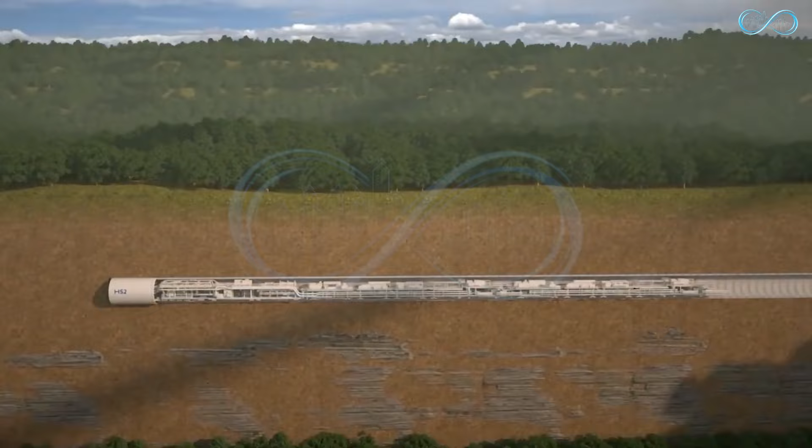Deep within the heart of mountains, massive machines slice through rock, clashing technology against nature. And through these clashes, the wonders of the modern world are born. Tunnels spanning thousands of meters connect the two sides of the mountains. In China, these engineering marvels are becoming a common sight. But how is China building these miles-long tunnels so fast? Let's find out. The beginnings.

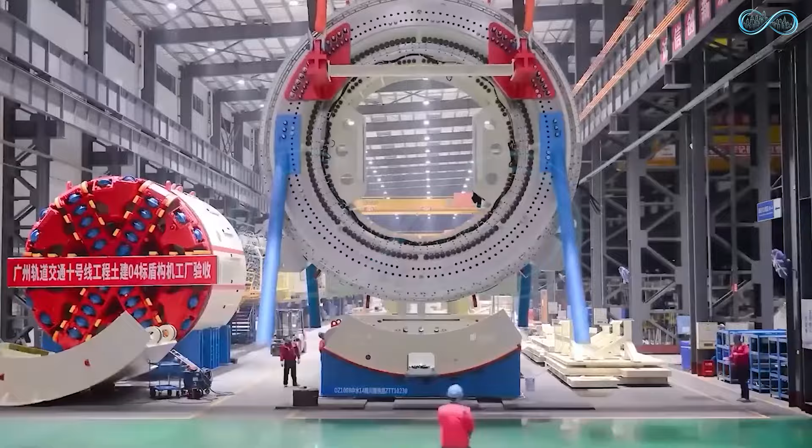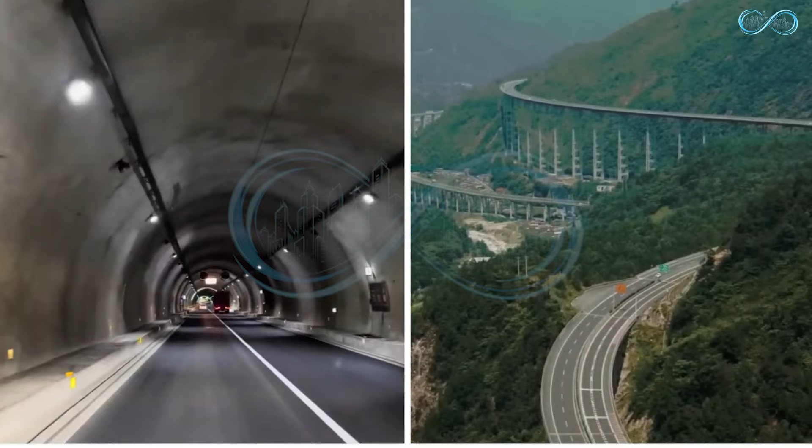The first question that may pop into your mind is, why does China build a tunnel in the first place? Surely building a road is much easier and less expensive than digging through an entire mountain made of hard rock. Well, to China, it is always about the long game. They don't just see the immediate gain, but also the long-term benefit. You see, normal roads have to wind around a mountain, snaking up with every twist and turn. Compared to that, a tunnel cuts straight through, turning the journey that would have taken hours by road into a matter of minutes. And this comes in clutch in the long term.

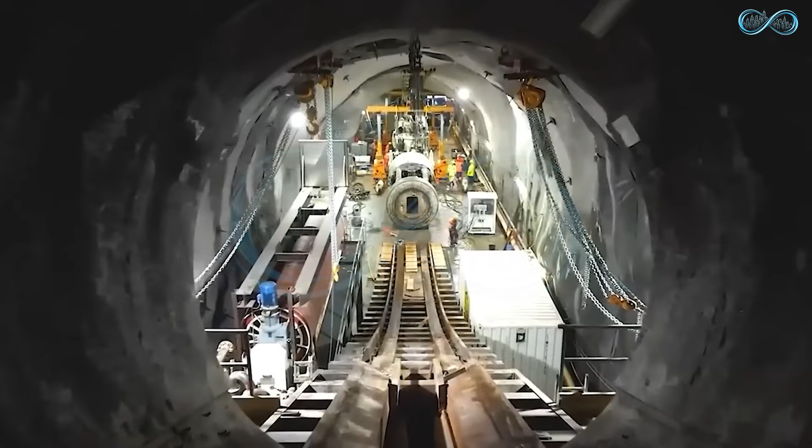This faster transit time translates to economic growth as people and goods can reach their destination faster. In just a few years, the millions China spent on building that tunnel will be recouped and keep giving back more in the form of job creation, talent distribution, and trade. But that isn't the only reason why China is building tunnels left and right. Turns out these things are actually saving lives.

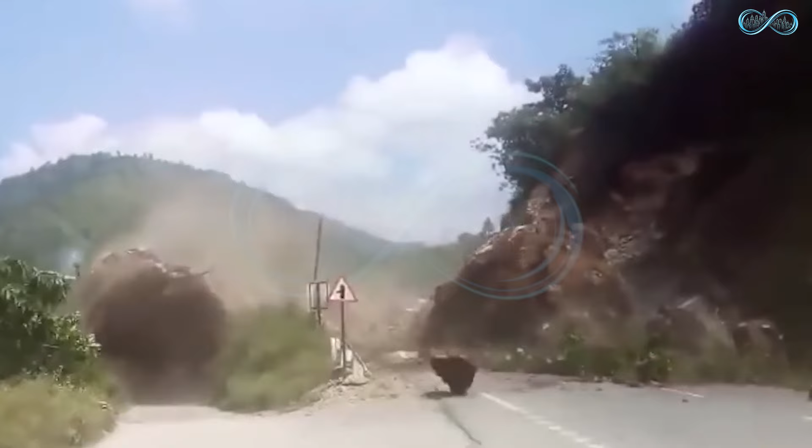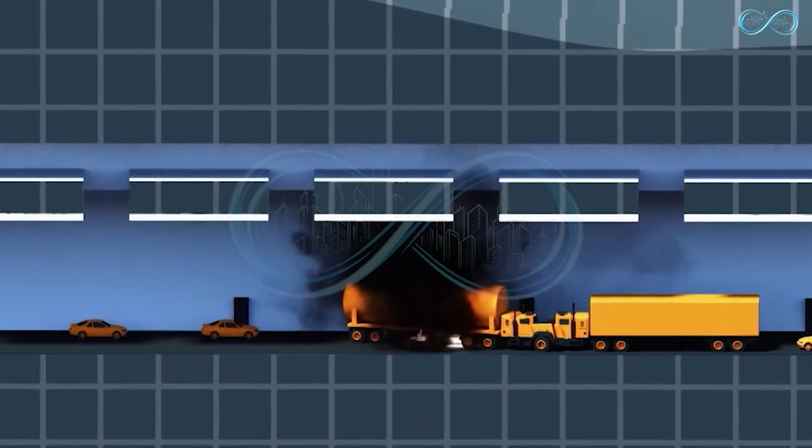Landslides are an ever-present threat to highways and roads built to cross mountains. One moment it is all calm, and the next a hail of rocks comes crashing down, destroying anything it encounters. And then there are those dangerous turns that hundreds of cars fall victim to every year. Tunnels don't pose these issues. They are a controlled route where most dangers are removed. And even if the worst comes to happen, there are safety protocols and evacuation systems in place to prevent harm. When you take all that into account, it becomes clear why China, a country that is making a huge effort towards making its economic centers more connected, is building so many tunnels.

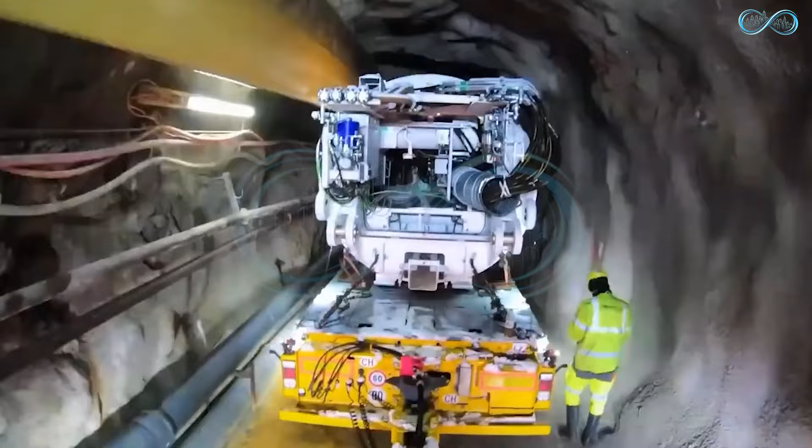Now that we know the why, let's move on to the how. Creating a tunnel that cuts right through a mountain is certainly no easy task. It's a complex process that begins months, even years before even a single rock is moved on the site. The very first thing that happens after China has decided to build a new tunnel and all the paperwork is done is land selection. After all, engineers cannot just randomly pick a spot and start digging. There are a lot of factors that go into this process.

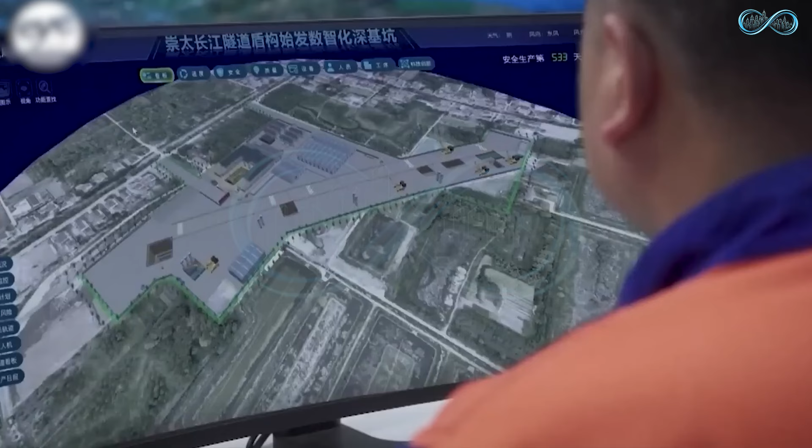Engineers pore over geological maps. Several different routes are selected, and among them, only a few make the cut. Boreholes are dug throughout the area where the tunnel is going to be to conduct tests. Additionally, cutting-edge ground-penetrating radars are deployed to map out the underground region and see if any significant faults exist. What they are looking for in these tests is whether the proposed routes have the right rock density and are stable enough to sustain the drilling process.

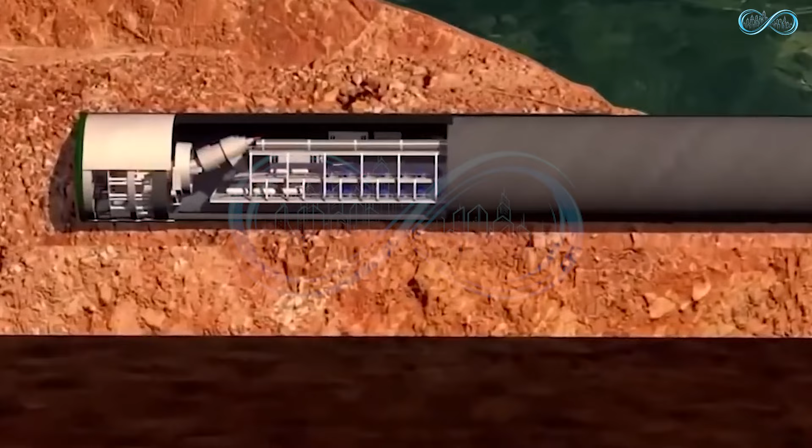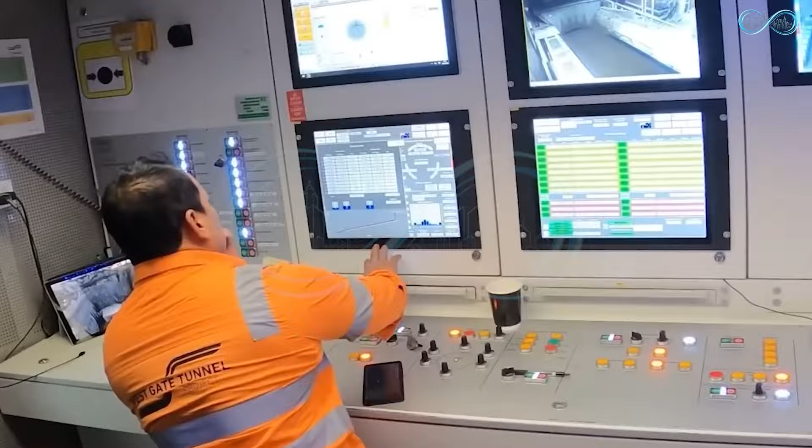They also look out for water aquifers or underground caves that may crisscross through the path, as they can add another layer of complexity for the project in the future. Experts go through this arduous process over and over again until they find the right land. And then the planning begins. This step involves figuring out the route in detail, determining what type of tunneling method is ideal for the project, and determining the dimensions of the tunnel.

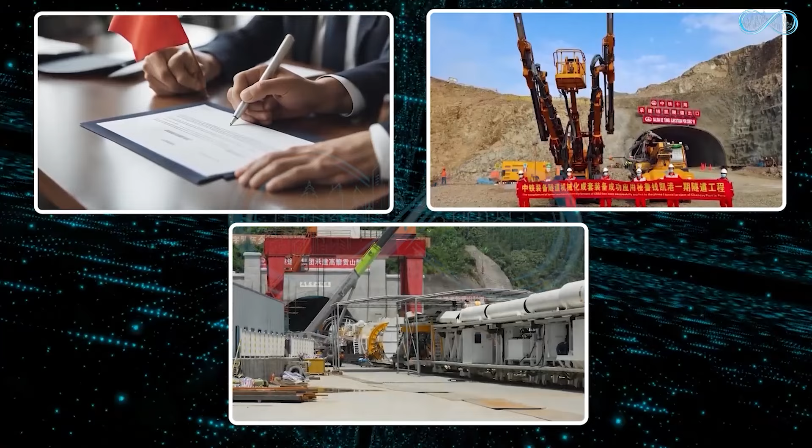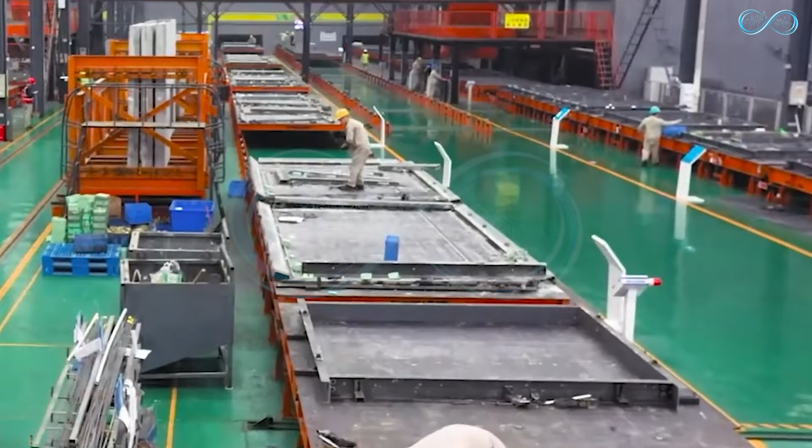An entrance and an exit point for the tunnel are selected and all the arrangements are made. Contracts get assigned, equipment is acquired, and materials are sourced. This process alone can take months, but that doesn't mean things are at a standstill. Experts continue conducting tests to determine the feasibility of the project. At the same time, factories around China start manufacturing prefabricated components.

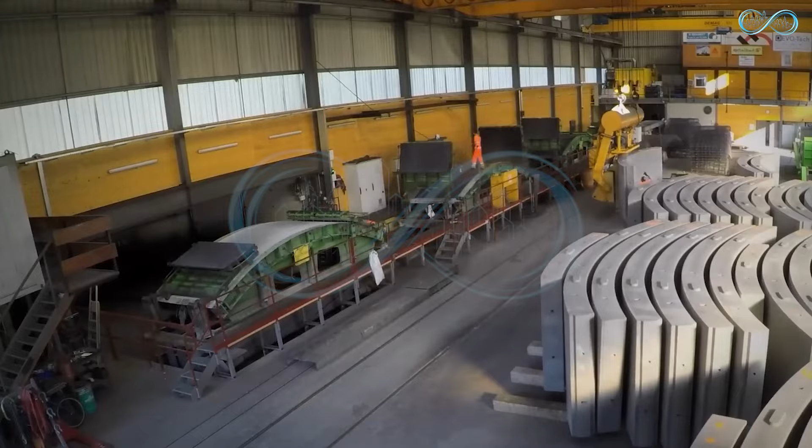China is a pioneer of prefabrication, and its tunnels are one of the mega project types that get the most advantage out of it. The tunnel liners, support walls, ventilation ducts, all of these things are prefabricated to save time and effort once the project actually begins. Compared to other countries, China prefabricates more materials for its tunnels, and by doing so, it is able to build faster and more efficiently. Once all that is done, it's time to dig the tunnel.

Now there are several different ways China digs its tunnels. The most popular of them all is using TBMs. TBM stands for Tunnel Boring Machine.

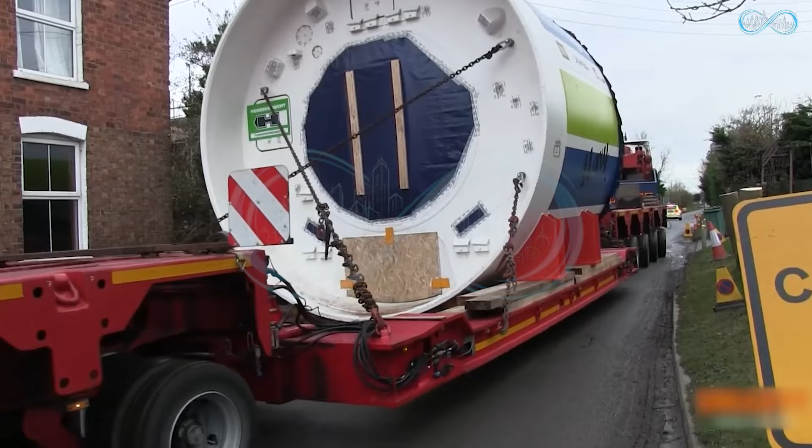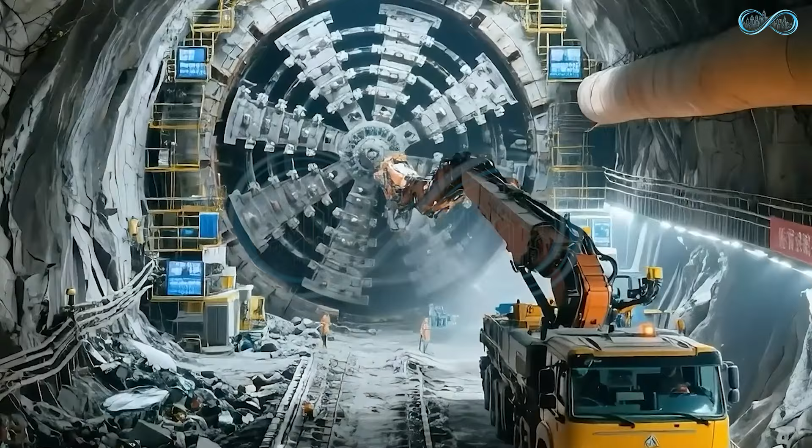And what exactly are those? Well, think of these like giant drills that are as large as the tunnel they are digging. These giants are designed to be a complete powerhouse that can cut through nearly any naturally forming rock effortlessly. So, slicing through a mountain is no big deal when you have one of these, and China makes great use of these marvels of technology.

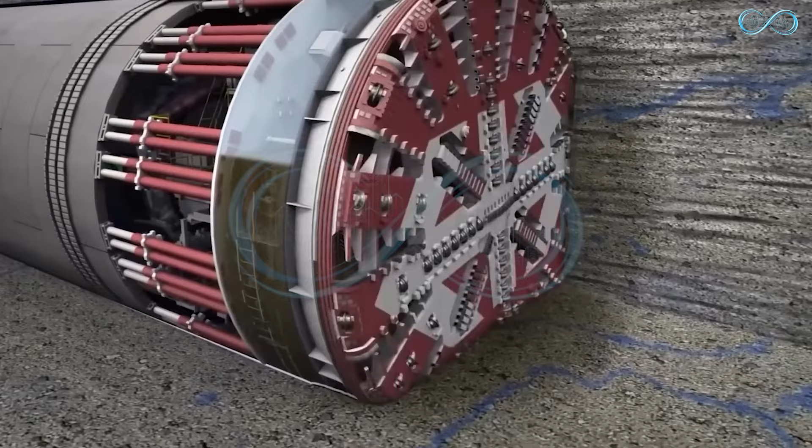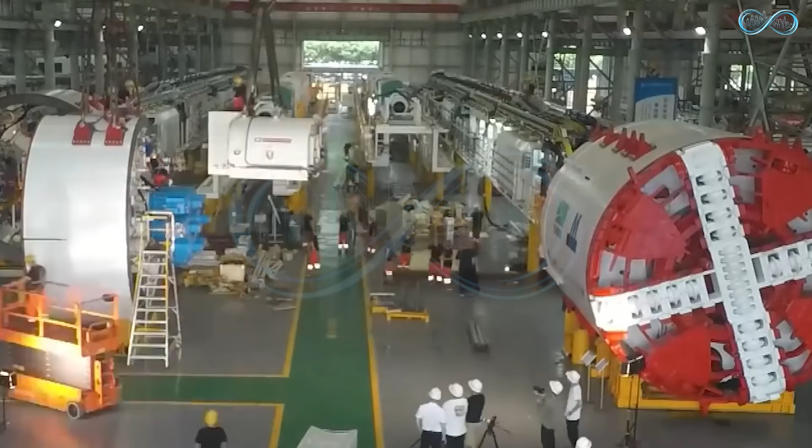But the question is, how to acquire one of these? The answer, at least for China, is incredibly simple. Just build one of them. You see, China is currently the top manufacturer of TBMs in the world. They are at the forefront of this technological innovation that is changing landscapes around the world. China is so good at building these that other countries come and buy their TBMs from China.

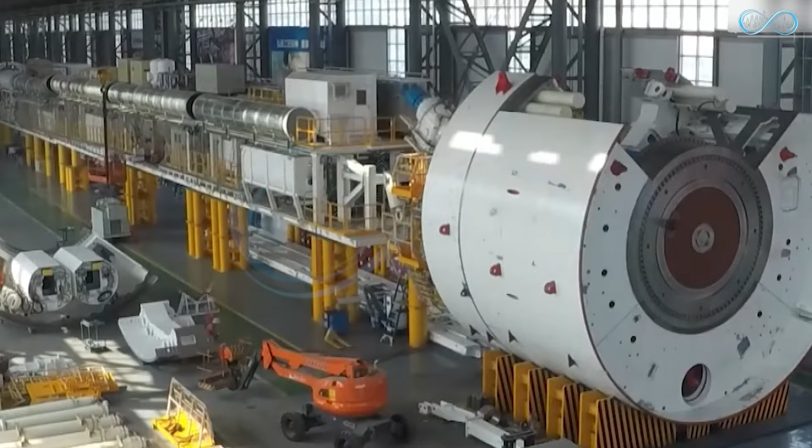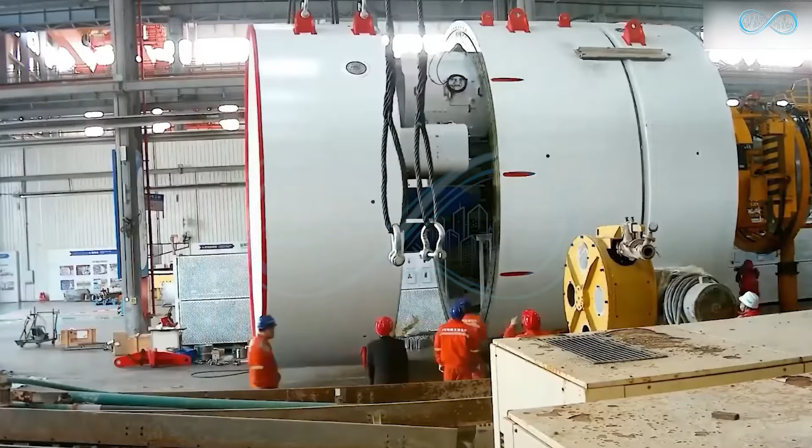So when China needs to build a tunnel, they simply have one of their state-owned companies make one. And that is no simple process. Building one of these TBMs requires months, even years of work. That's because each one is customized to the kind of project it is going to be used in. The type of land, depth, and rock types the TBM will work through all play a factor in component selection.

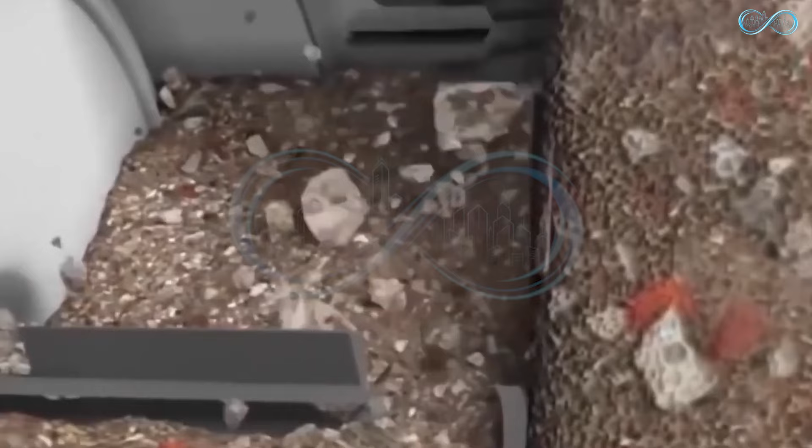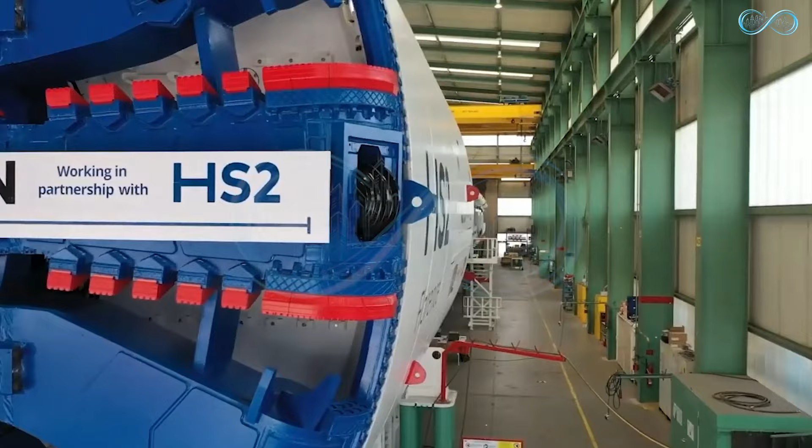First, experts create a 3D virtual model of the machine and run tests on it. And when everything has been refined down to perfection, the real work begins. Over the coming months, the components are sourced and the TBM is put together. Every component used is built domestically, no outsourcing. And once the TBM has been custom designed for the workload it is going to face, it is taken to the excavation site, where the tunnel is going to start being dug.

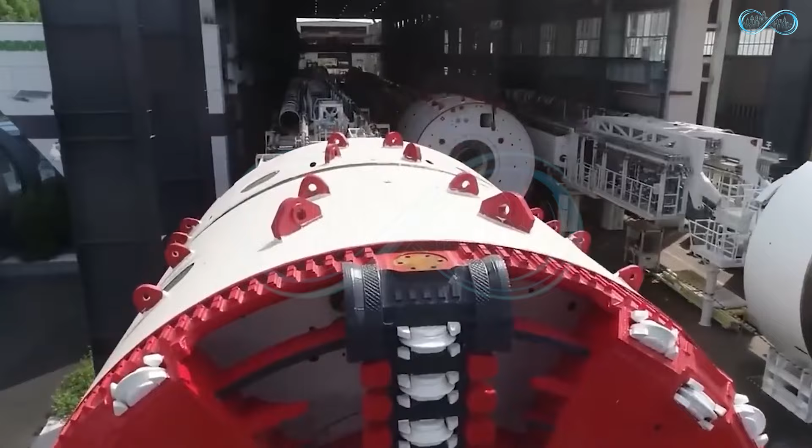This is usually done by disassembling the TBM into sections, transporting them separately, and then reassembling them at the site. And there is a good reason why that is necessary. TBMs usually weigh hundreds, even thousands of tons. And for a large tunnel, you are reaching the absolute limits of TBM size, reaching over 5,000 tons.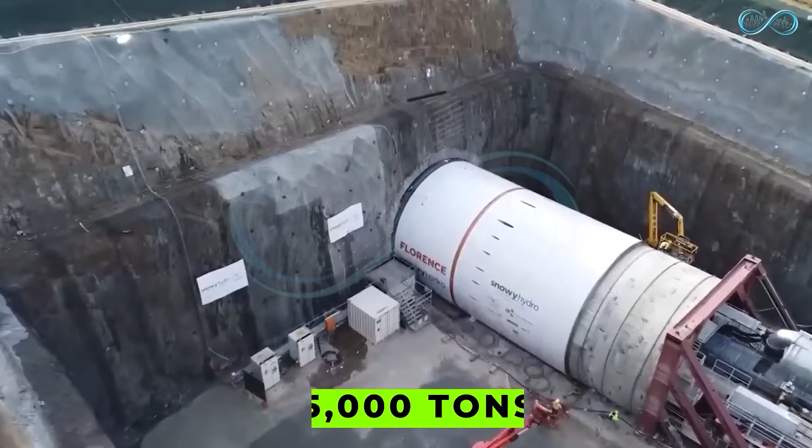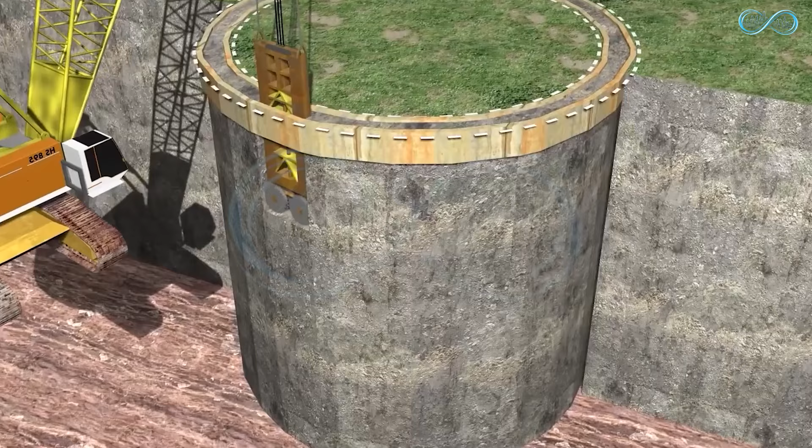Once the TBM is on site, the digging process actually doesn't start as you may be thinking. They don't set it on the ground and let it run into the mountain. Doing something like that would cause a landslide quite easily, bringing heavy rocks down on the expensive equipment and workers. Instead, the experts dig what is known as a launch shaft.

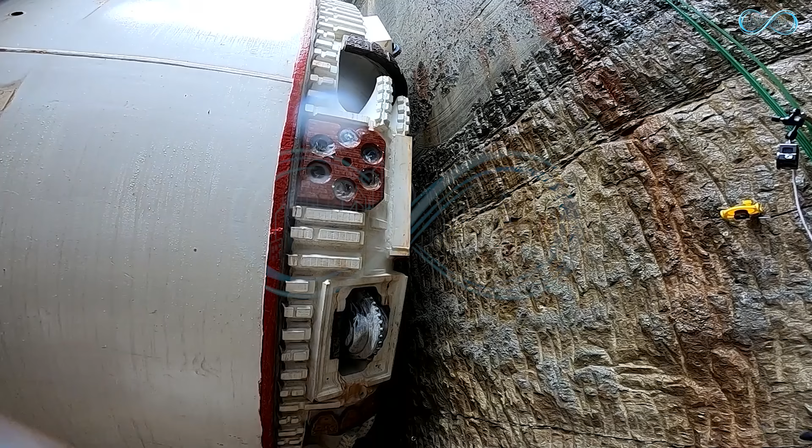What is that? It is a vertical shaft that is dug during the preparation for the tunnel's construction. It is large enough to accommodate the TBM and has been checked thoroughly for structural integrity. Think of it as the starting point for the tunnel. This point has been selected after careful testing to be the best place to start drilling, and it places the machine at the perfect height needed for the tunnel.

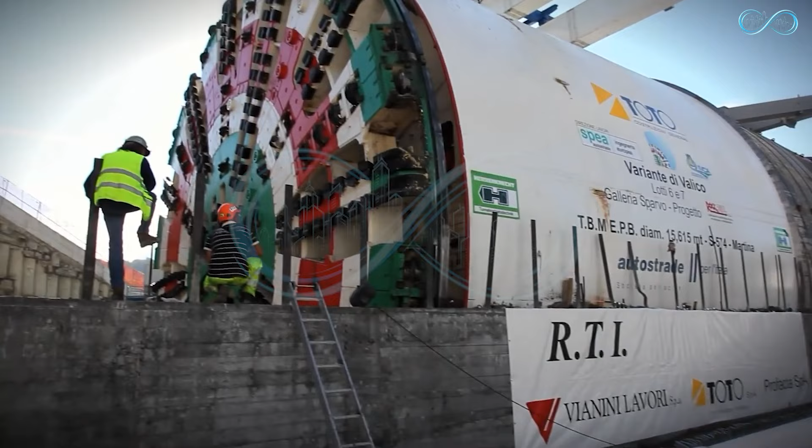The sections of the TBM are lowered into this shaft using powerful cranes. The cutter head is the toughest part to get down there since it is the heaviest and largest. But once everything is safely down there and the engineers have assembled the TBM, work can at last begin. And how these TBMs work is quite fascinating.

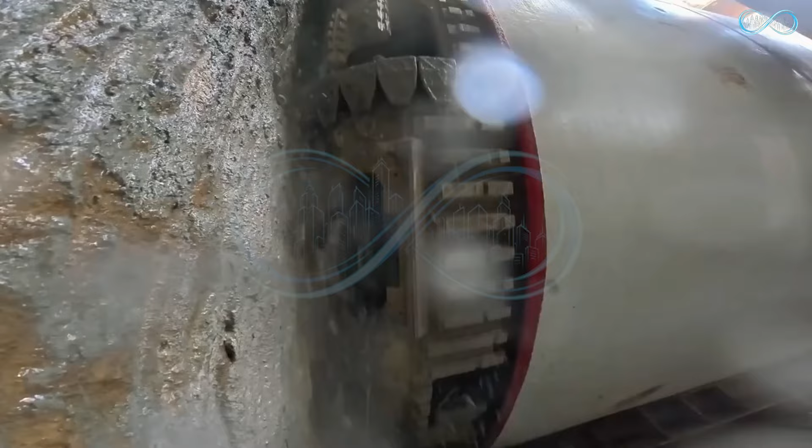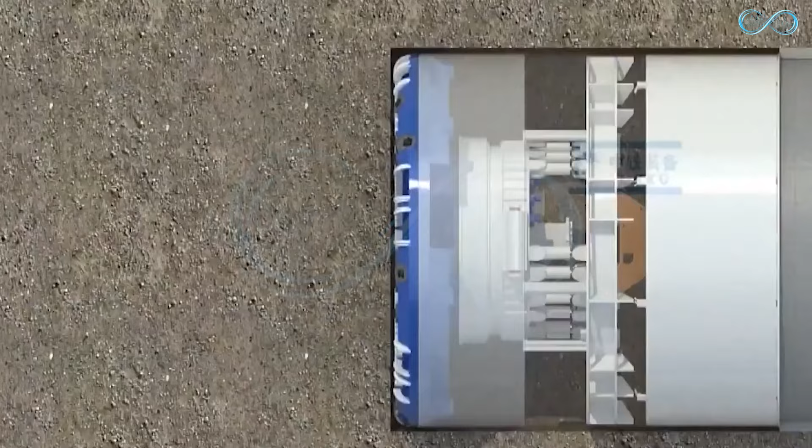The main component being used is the main cutter head. This gigantic disc is made of a hard metal with blades attached to it, and the entire thing is rotated using a powerful motor. With each spin, it cuts into the earth, breaking apart rocks and slicing out the dirt. Think of it like a drill head. But just like a drill head, this cutter head is also only a part of the equation.

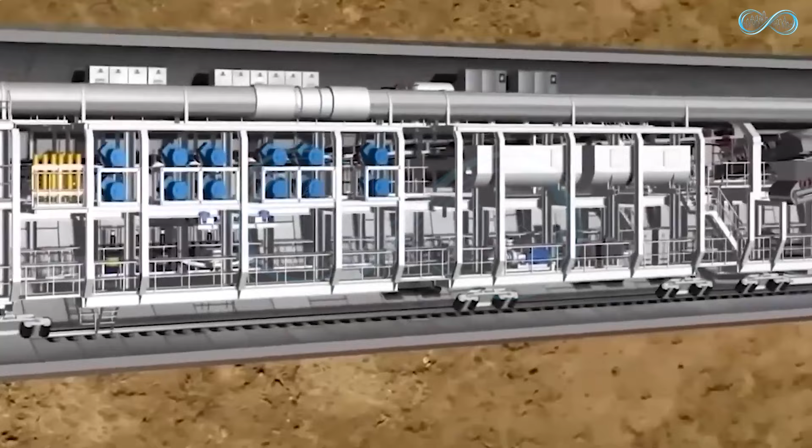There needs to be force pushing it into the rocks to make it function, and that force comes from hydraulics. The TBM has an extensive system of hydraulic mechanisms that often extends tens of feet behind the cutter head. The TBM anchors onto stable points and pushes itself forward with so much force that the earth itself gives way. And while all that is happening, another thing is happening at the back.

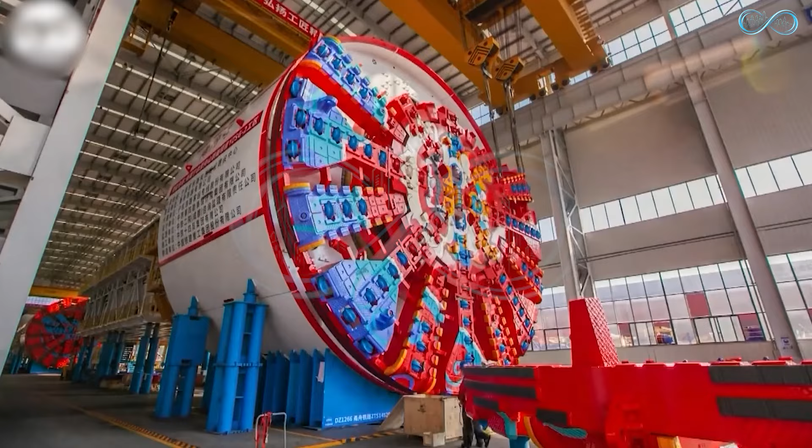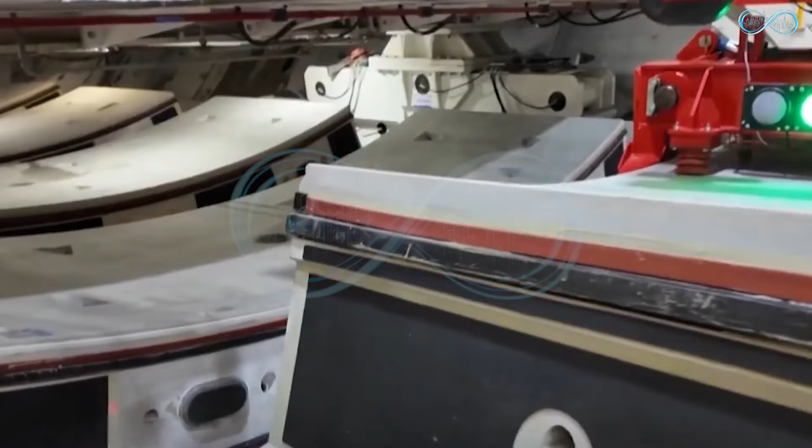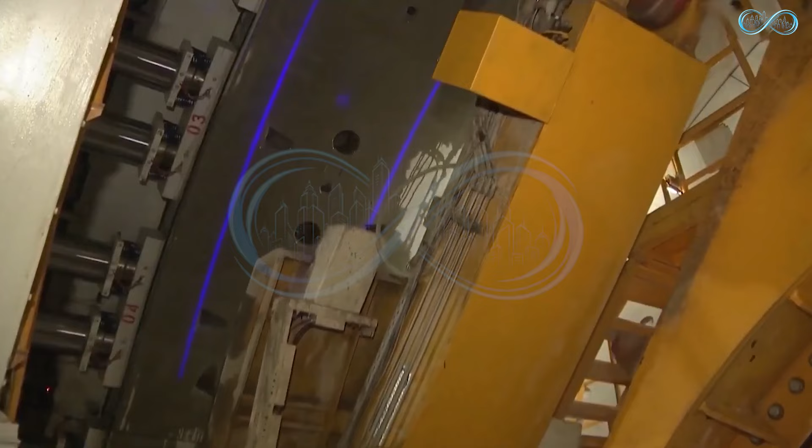There are mechanical arms usually installed on TBMs in the factory that serve a very specific function. These arms are designed to install prefabricated tunnel lining slabs in the back. These concrete segments have been prefabricated in a factory as well, and they are installed simultaneously as the TBM progresses with the digging. And these segments actually serve a dual function. The primary function is, of course, to line the tunnel to provide support, helping prevent cave-ins while also functioning as the very base for future addition of tunnel lining.

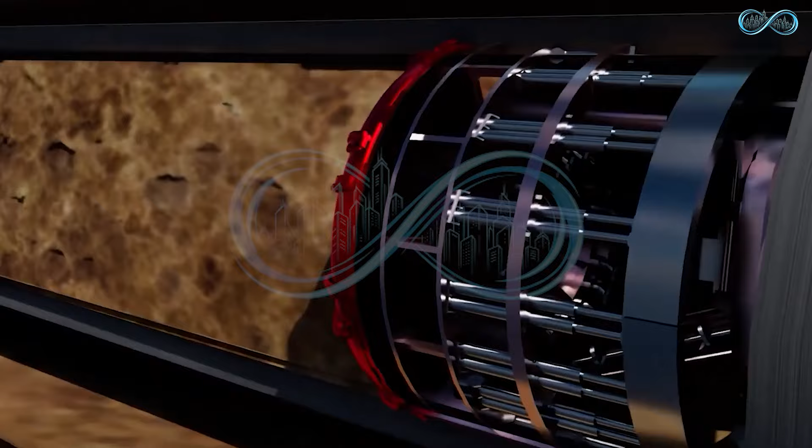The other major function of these segments is to act as braces. Remember I mentioned how TBMs use hydraulics to push themselves forward? Well, in most modern models, the TBM is actually bracing itself on these concrete segments to push forward, as they serve as a consistent surface to attach to. This way, the operators don't have to constantly find or create a bracing point for the machine. The process is automated.

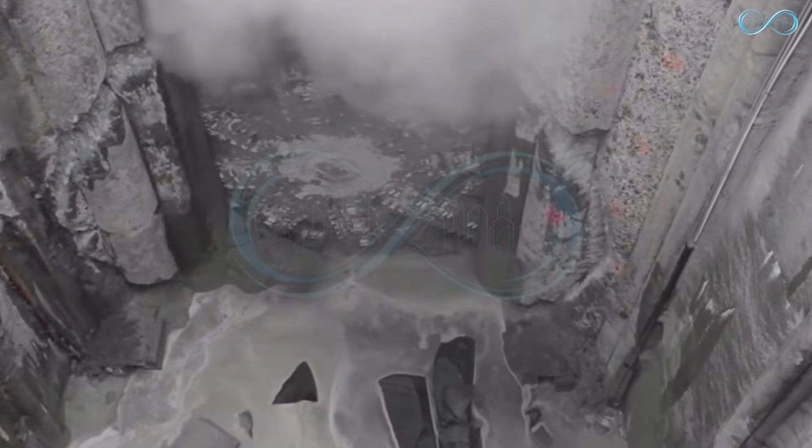Now, as the TBM is pushing forward, another thing is happening. A slurry, kind of like muddy water but thicker, is being pushed out of the machine. This water is actually the crushed rock and mud that are being excavated by the cutter head. You see, to aid the cutting process, the TBM is usually pushing water into the area being cut. This water helps reduce heat, makes clearing away the debris easier, and also reduces wear.

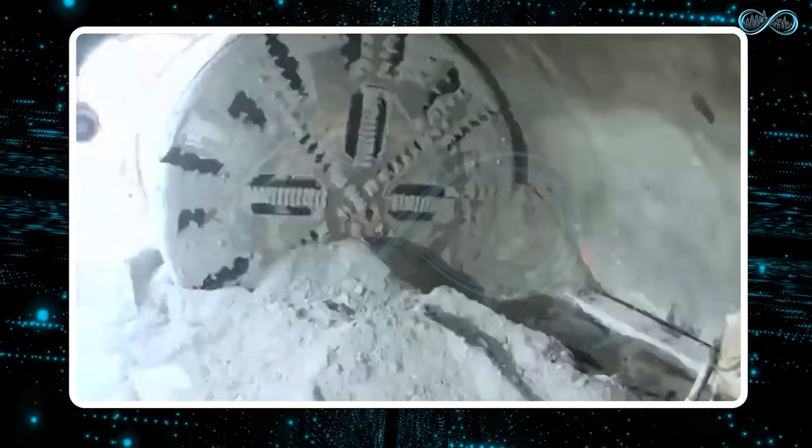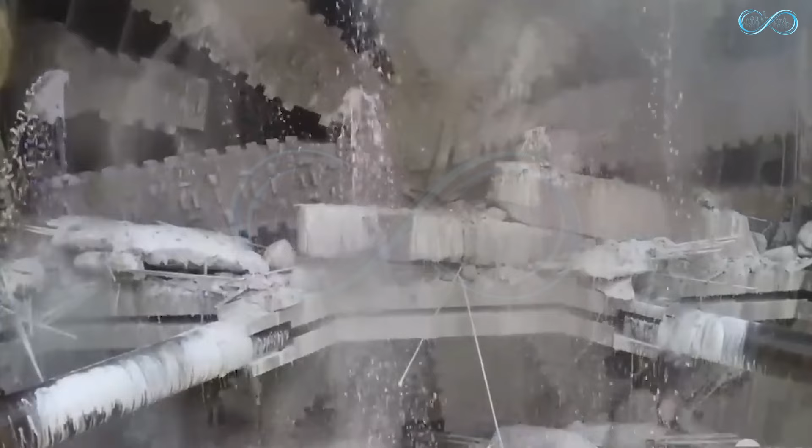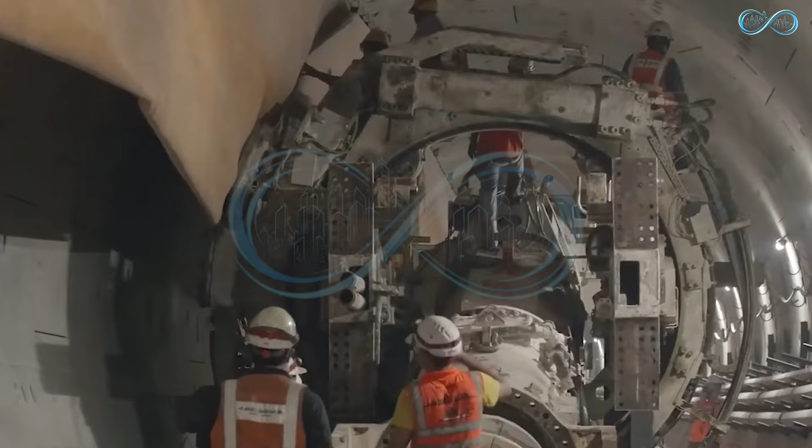TBMs have special channels built in that allow them to push out this slurry, but it's not like it's going to waste. For most tunnel excavation sites, they don't have an unlimited amount of water, so they have to get creative. A recycling plant is installed on the surface, which is connected with the TBM. The slurry is carried to the plant via pumps. All the mud and rock are extracted, and the now clean water is pushed back into the TBM for another cycle. This way, the engineers are able to minimize the impact on the environment while also maintaining an uninterrupted workflow.

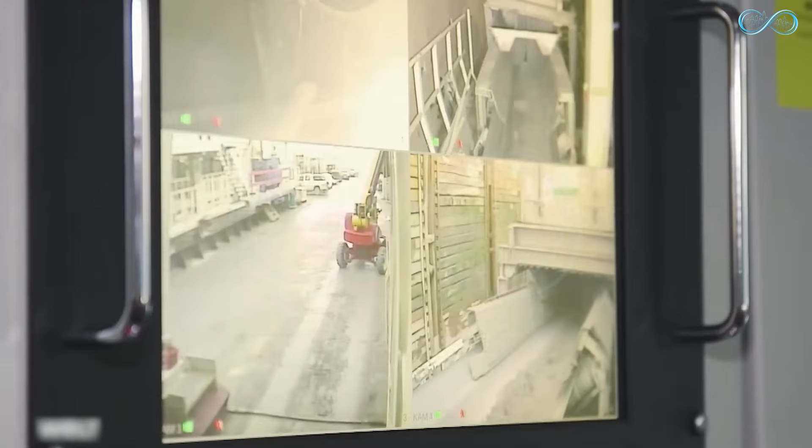And that's how a TBM progresses through the tunnel, clearing a few feet every hour. A slow and steady progress powered by powerful motors, hydraulics, and exceptional engineering. But it is important to understand that these TBMs are extremely sophisticated devices. They are lined with sensors that are constantly monitoring not only the machine, but also the surroundings.

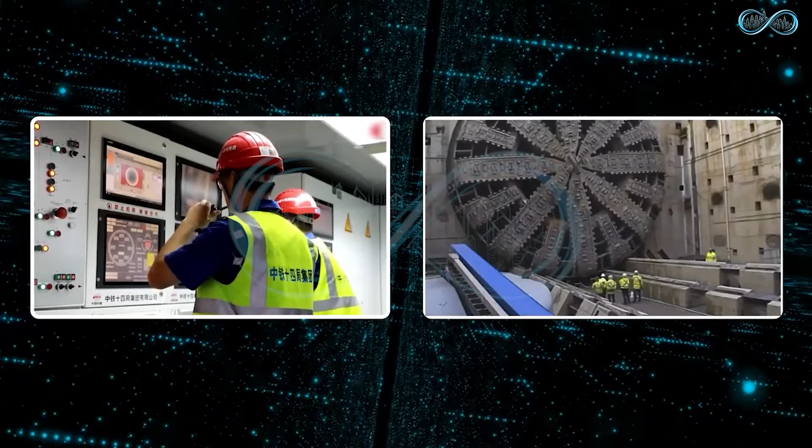A modern TBM has detection systems for dangerous gases like methane and hydrogen sulfide, while also monitoring the oxygen levels. TBMs also have seismic prediction tools and ground-penetrating radars constantly monitoring the surroundings to identify any possible instability that could result in a cave-in. If anything seems to be going wrong, alarms blaze and the workers evacuate. And as a final benefit, these machines also have a shielded area that helps protect workers.

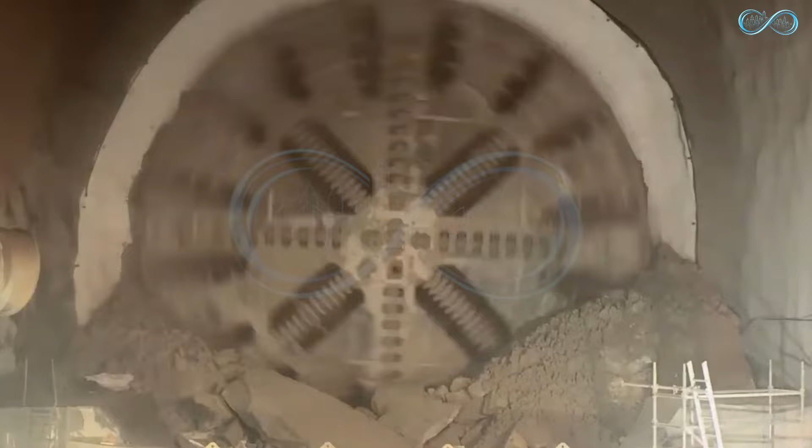The only problem is that as these giants move forward, digging through the ground, they kick up quite a lot of dust. This is why a very sophisticated ventilation system is installed and extended alongside the tunnel. This system evacuates all the dust from the tunnel to make it safer to work in. Additionally, there are navigation systems built into the TBM to guide it along the planned route. The work is precise to the extreme. These machines don't stray more than a few inches from the assigned route, even after digging for miles.

Slowly but surely, the massive machine digs out the extensive tunnel, slicing through the mountain's roots in the process. And eventually, after months of work, it reaches the last stretch. The end comes near, and awaiting at the finish line is a reception shaft. This is much like the deployment shaft, but it serves the opposite function. The TBM breaks through into this hollowed-out vertical cavity in the earth where its journey ends.

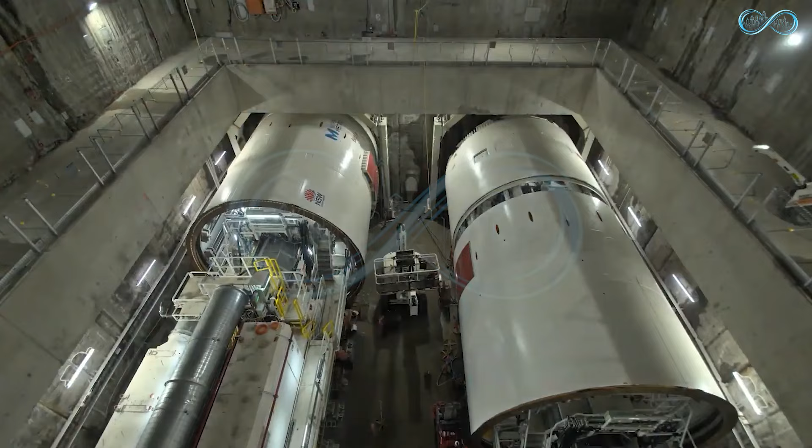The story doesn't end there, though. The workers cannot just leave the TBM lying here blocking the exit of the tunnel. The TBM needs to be removed. There are two ways that is done. The TBM can either be disassembled, removed from the reception shaft in pieces using a crane, and then loaded back up onto trucks to be taken to its next project, or it is laid to rest.

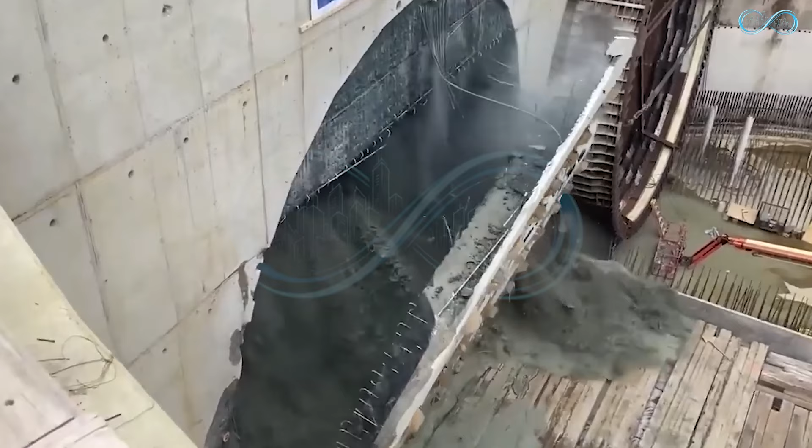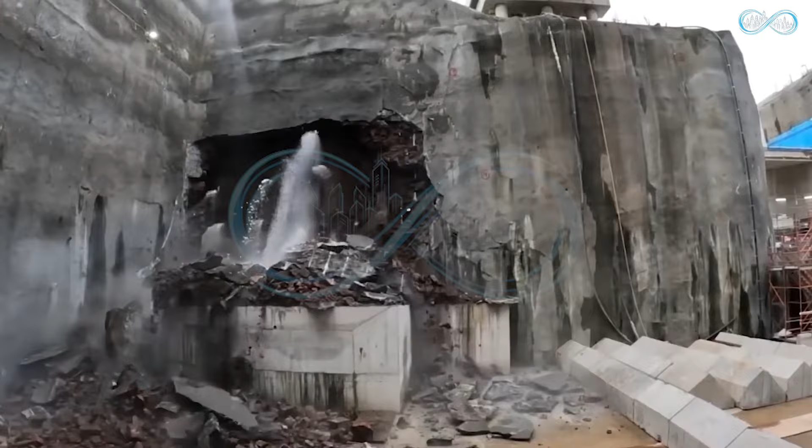You see, most TBMs are just built to fulfill their targeted project, and then they don't have any use left. They are custom built with the requirements of the project in mind, meaning they are not suitable for another tunnel that will have different conditions and specifications. And if a TBM cannot be reused, it is disposed of in a very interesting way. Workers dig out a giant hole in the ground. The TBM is then lowered into the hole, and it is filled back up with dirt.

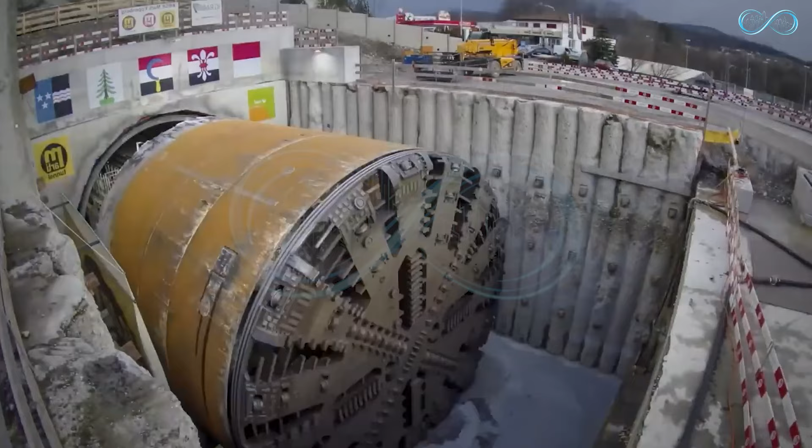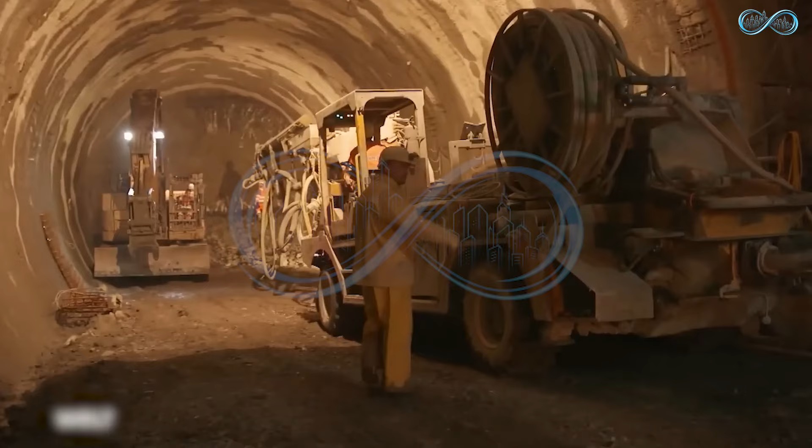More often than not, this burial is done right around the exit of the tunnel with the road built above it. Once that is done, it is time to decommission the shafts. Both the launch shaft and the reception shaft are filled back up with dirt as well. Just like that, the tunnel is finished, an arduous journey completed after months of effort. But it's not like digging with a TBM is without its own risks.

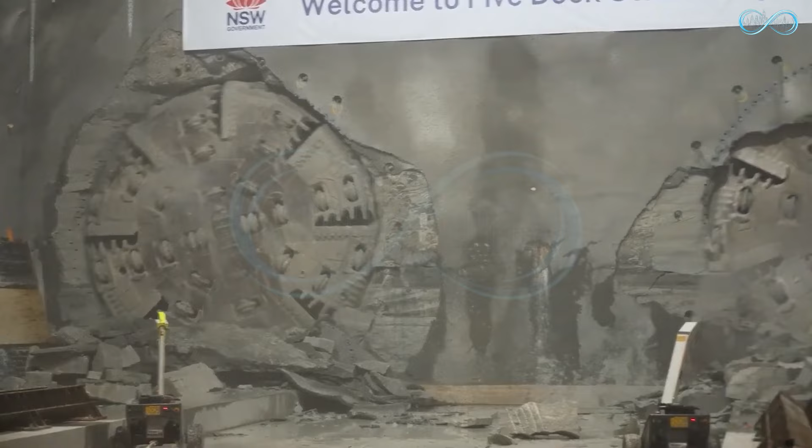If the ground conditions aren't right, the entire thing can sink or get buried in a cave-in. Not only that, since hydraulics are involved in the process, there can be deadly hydraulic leaks and even blowouts from the slurry. Workers operating these things and working around them risk their lives and limbs every day. Still, TBMs are considered the safest tunnel excavation method in the world.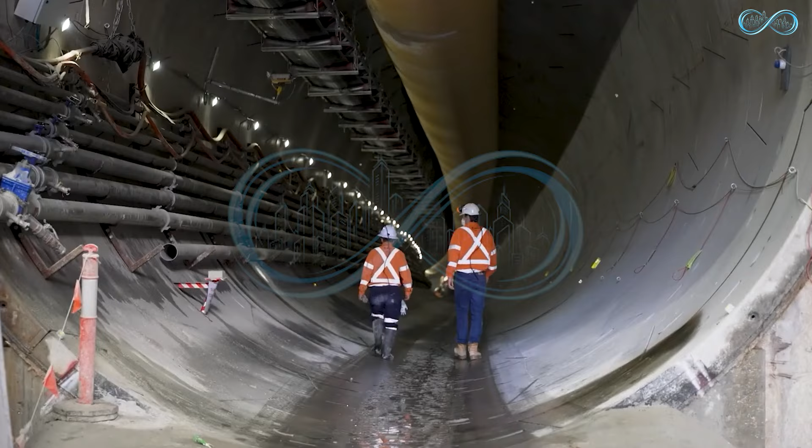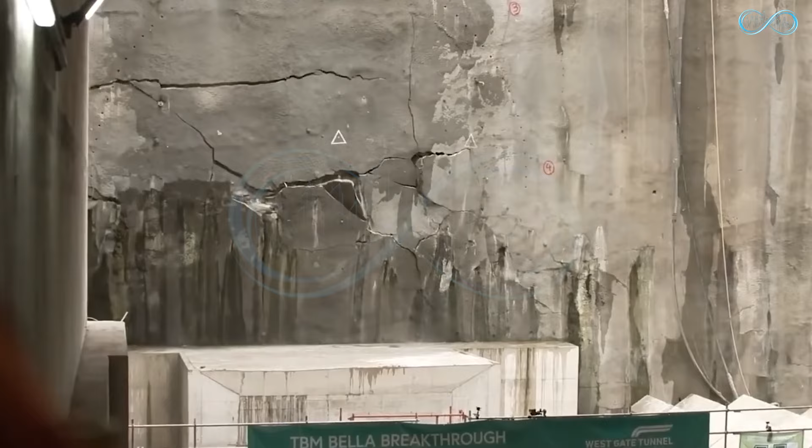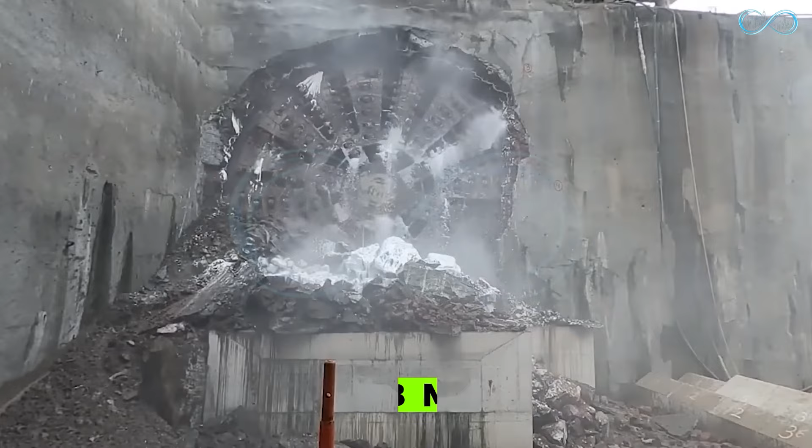But that doesn't mean they're the only way China has of building tunnels. That's because in some cases, a TBM may not be the best choice for the job. If the ground is too hard, has varying density, or the route is simply too curvy, a TBM won't be able to handle it. In those cases, China opts for a different tunnel excavation method, one that is a bit more explosive. Bomb blasting. China doesn't just know how to dig tunnels using TBMs, they have a long history of excavating using explosives, and they have it perfected down to an art.

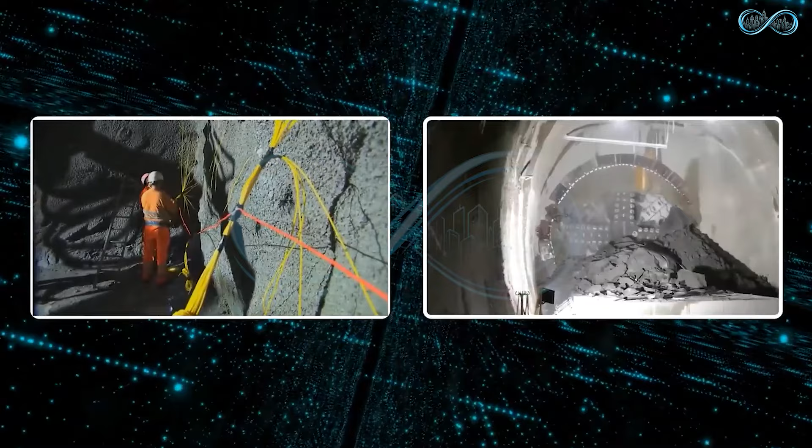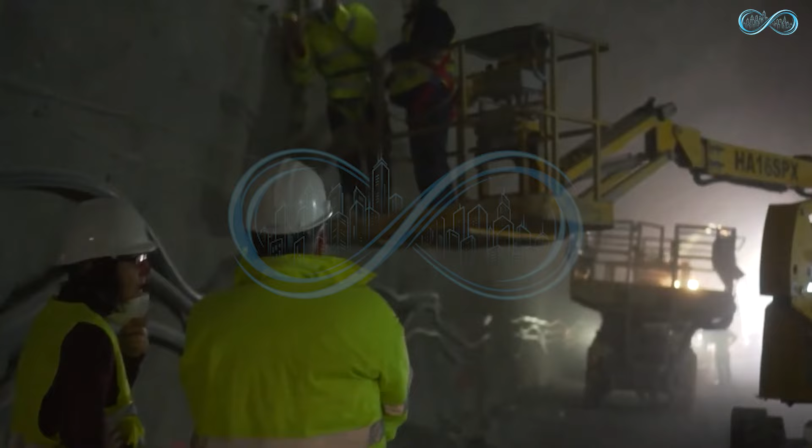The first step is, of course, surveying. The process is a lot more rigorous here compared to TBM excavation, and that's because explosives create a lot more seismic disturbance, so the route of the tunnel and the ground being dug through have to be studied extensively to ensure they are stable enough to handle the vibrations. Tunnels dug this way also have a starting vertical shaft dug to start off the digging process. What comes next is a repeating cycle. Blast after blast will help progress the tunnel until it reaches the end point. Here is how it works.

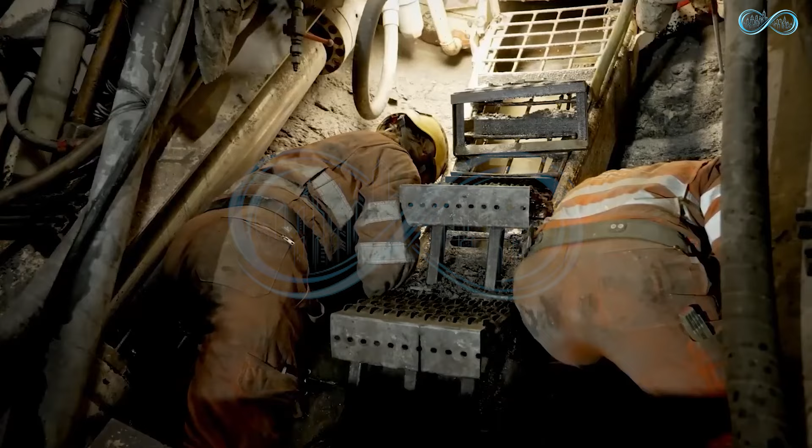The first step is drilling. Experts create holes throughout the surface that they need to blast through to clear the next section of the tunnel. These holes serve two functions. First, they hold the explosives in place, and secondly, they allow the charge to be placed very deep into the rock that needs to be blasted open. This way, the force is directed where it should be, instead of back into the tunnel that has already been dug. Once the holes are finished, explosives are stuffed into them to the very end.

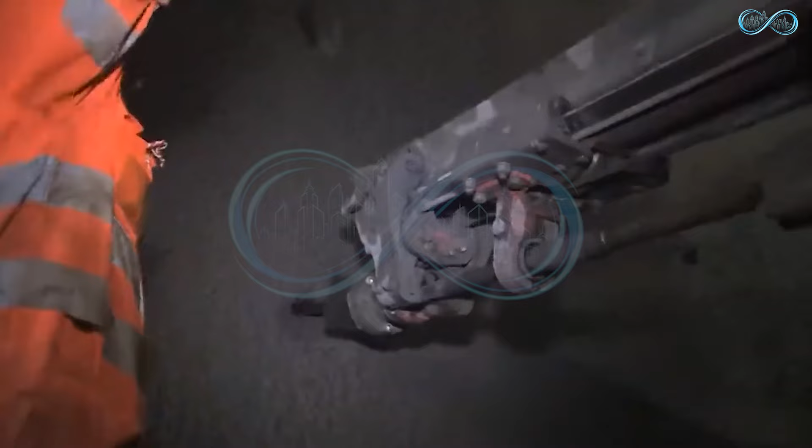Attached to these explosives are fuses. These fuses take a long time to burn through, and there's a good reason why. Once the main fuse has been lit, the workers have to get as far away as possible from the area. The longer fuse time allows them to get far enough away. Slowly, the spark progresses as the workers run for cover, and once this spark reaches the explosives, it's a huge boom.

The placement of the explosives has been carefully measured. They are placed perfectly to target the weak point of the gigantic rock blocking the tunnel's progress. Each explosion across these holes is like a giant hammer pulverizing the surroundings. The order of the explosions, their intensity, and their timing have all been pre-calculated for optimal results. And these results aren't immediately visible. That's because the explosion kicks off a cloud of dust that would take hours to settle.

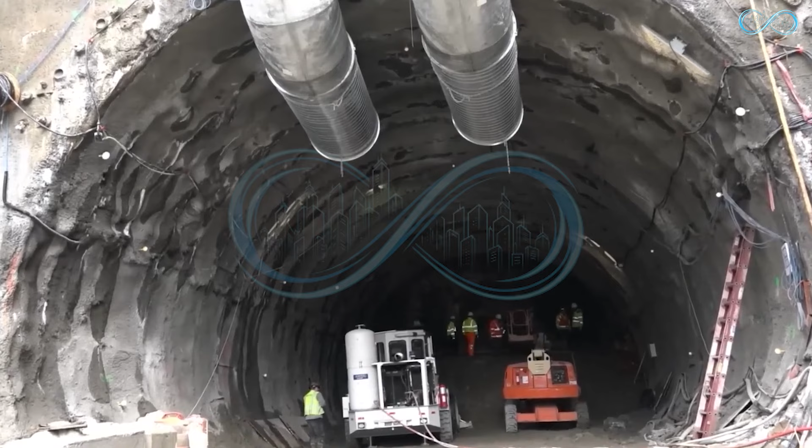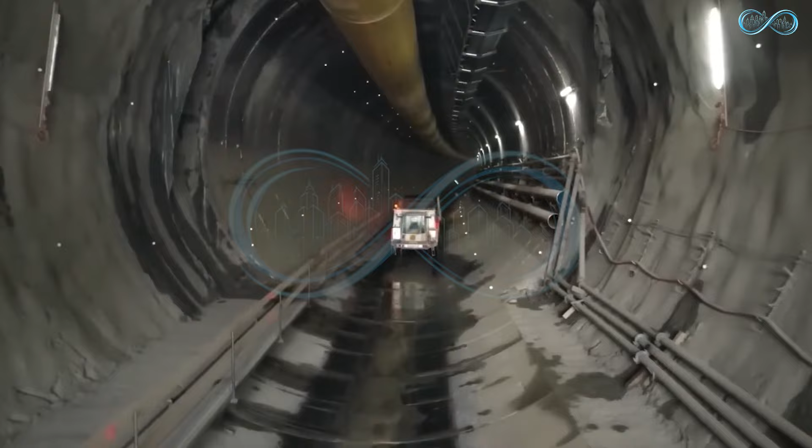But the workers don't have that kind of time. They have already installed a ventilation system that kicks into action as soon as the bombs go off. It sucks up the dust in a matter of minutes, revealing the expected. Where there was a giant boulder are now these smaller rocks, and to clear the path forward, they have to be removed. But approaching those now wouldn't be a good idea. When such an explosion occurs within the bowels of a mountain, it often weakens the surroundings.

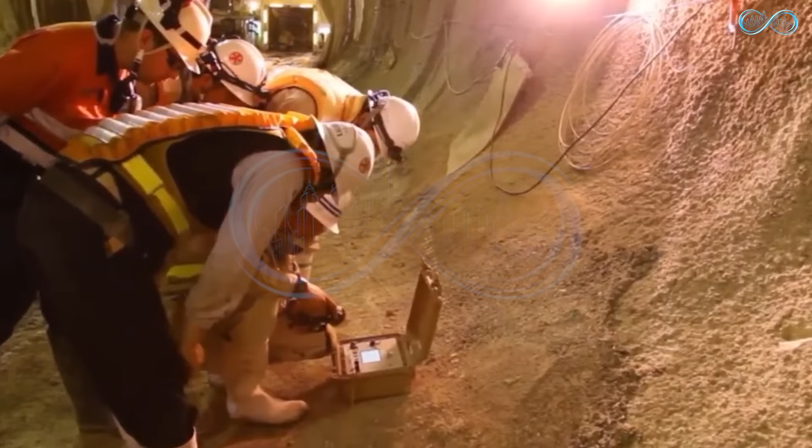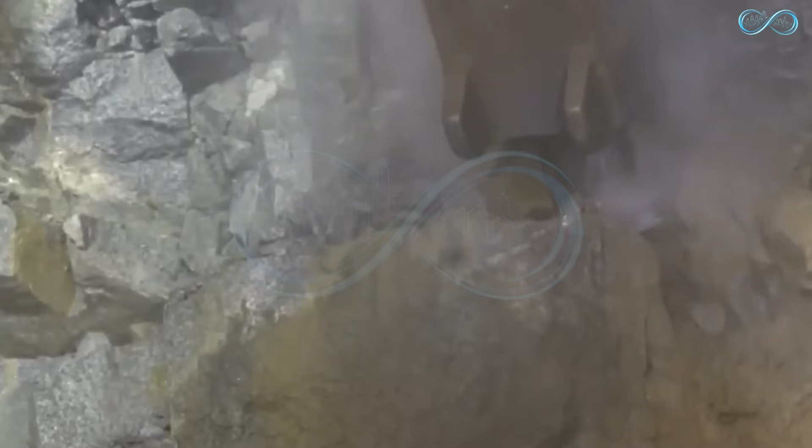Before the workers can go anywhere near the excavated area, they need to check the structural integrity. Experts do so using advanced tech like ground-penetrating radar and even robots. In some cases, if the area is deemed safe enough, the workers approach. But before they can touch any of the debris, they first need to add supporting structures to maximize their own safety. These prefabricated supports help hold everything up to further reduce the possibility of a cave-in.

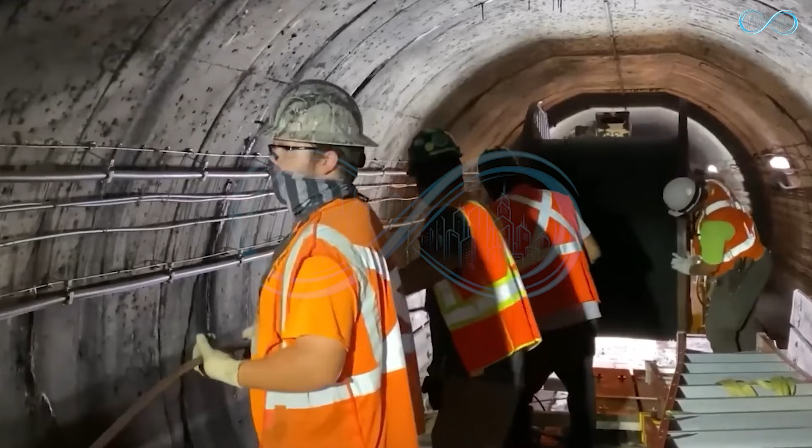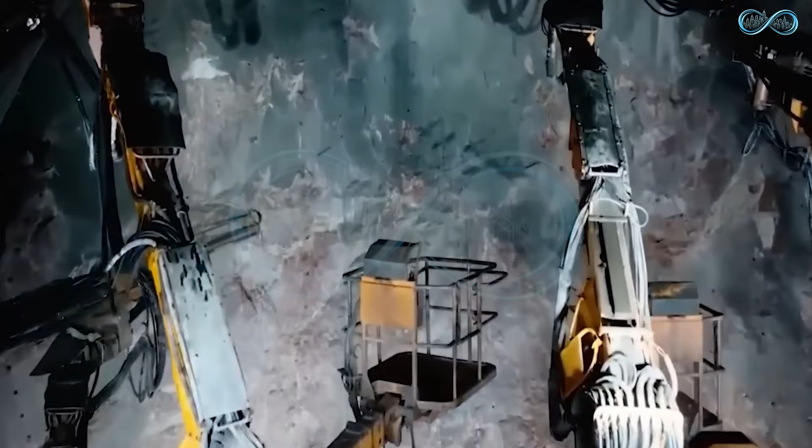With all that done, the workers at last begin removing the debris, clearing the way until all the smaller stones are cleared away. And then the cycle gets repeated when a big boulder is encountered again. Explosion by explosion, the tunnel keeps on extending until eventually it reaches the end. This method of tunnel construction is quite fast, but at the same time quite risky. Even a small mistake can be deadly, which is why China is slowly phasing out this tunneling method entirely. It is not as common anymore as it used to be, especially since China is now moving towards another tunneling method called sequential excavation.